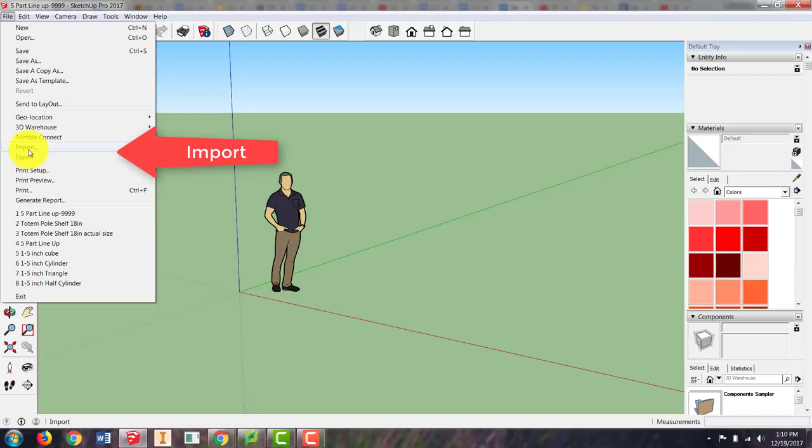It should default to your folder where you can see your 5 parts. The first one you made was the 1.5-inch cube. Select that and import. You will notice how small it is in comparison to the person there.

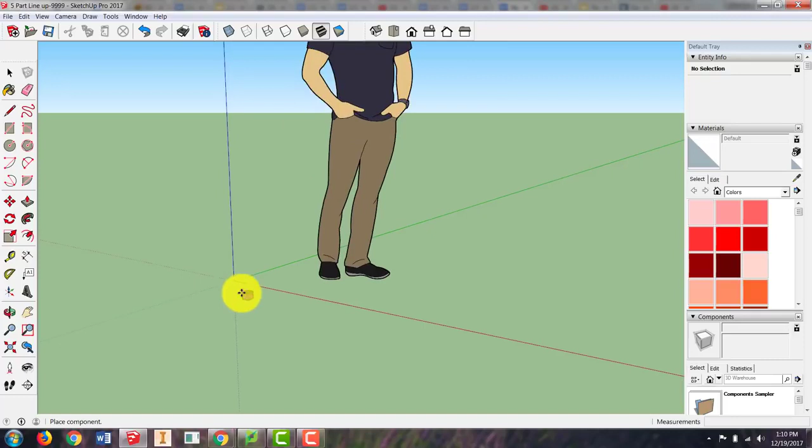So zoom in to the 3 axes. I always like to start on the intersection of those, the origin. It should snap to that center point. Click and release, and you have it in place there.

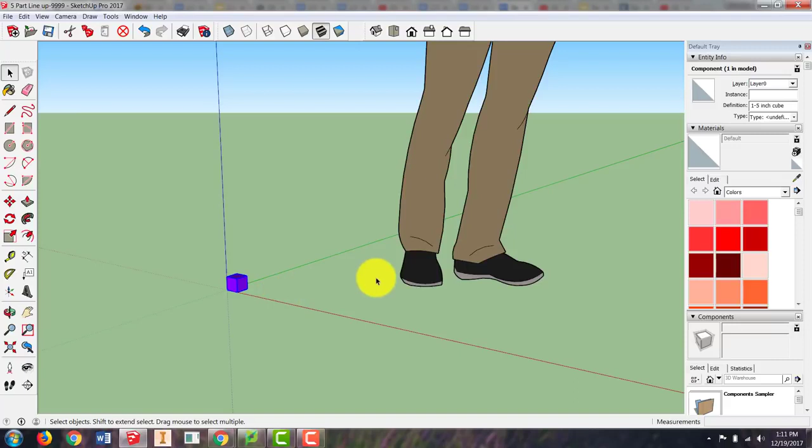Now, with the selection tool, now that I have my first object down, you can see in relation to the person if it's the right size. That is my 1.5 inch. I'm going to remove the person so we can import our next one.

Go up to File, Import, and select the next one, which I believe was the 1.5 inch cube with hole. Import. Now when it's pulling it in, I'm going to try and keep all 5 of my parts on this red axis line, so they're all in a row. It should be easy enough.

It should snap to the red line. Go ahead and put it close to the first one. Click once, and it releases and places that object. Now we can go get our third part.

Go up to File, Import, and the cylinder. Import. I'm going to bring that in. This one, notice it's snapping on the center line to the red line. That's okay, I'm going to place it there.

So far, so good. We're doing this so we can compare the different sizes to make sure we are on the right track with our sizes. It's difficult to see if we've made a mistake with our sizes when it's in its separate file, so it's a little easier with all 5 of them in one place.

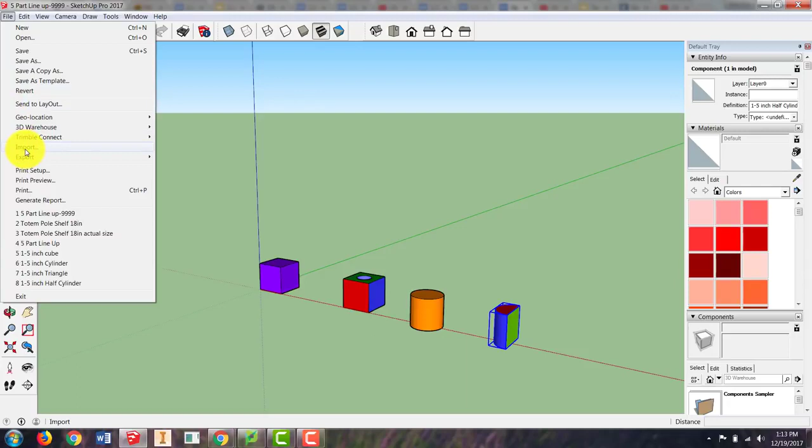I'm going to go up to Import again and choose my half cylinder, and I'm going to snap it to my red line. And the last one, I'm going to go up, File, Import, and choose my triangle, and place it on the red axis.

Now, at least I can see that they're all in line, they're all similar in size, but we're also going to practice moving these objects.

First, I'm going to use the selection tool, and I'm going to come down and select the cube with hole. I'm going to zoom in a little, and now, if you've used it before, the Move tool.

I'm going to select the Move tool, and the trick to using this Move tool is selecting a corner as a reference on where you want to place it. So I can move around the side of this box, and I can grab it from the center, the corner, or other sides.

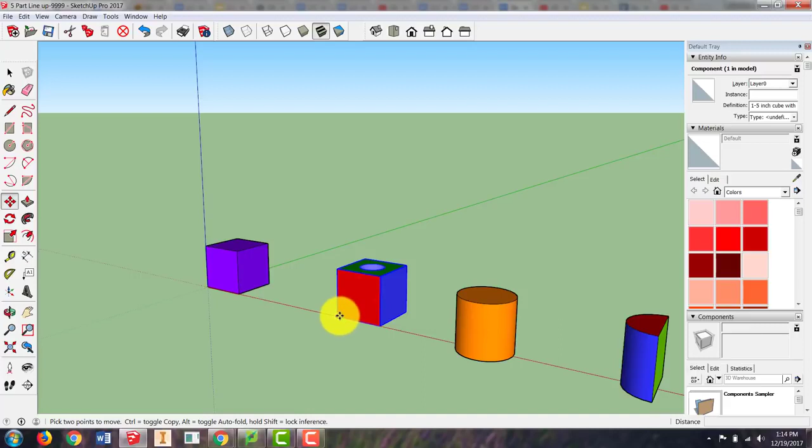Since I know I want to place this corner next to this corner of this object, I'm going to move this cube with the hole from this corner. I click on that, and it's going to slide, and I'll zoom in until it touches the neighboring object. I'm going to click and release, and you'll see that they are attached. You can rotate face to face.

Now, this is the tricky part with the Move tool. This is still selected. If I come over to my cylinder and click on it, it's just going to move the original box because I have not selected anything different. So I'm going to put that back in place, and I'm going to use the selection arrow and select my cylinder.

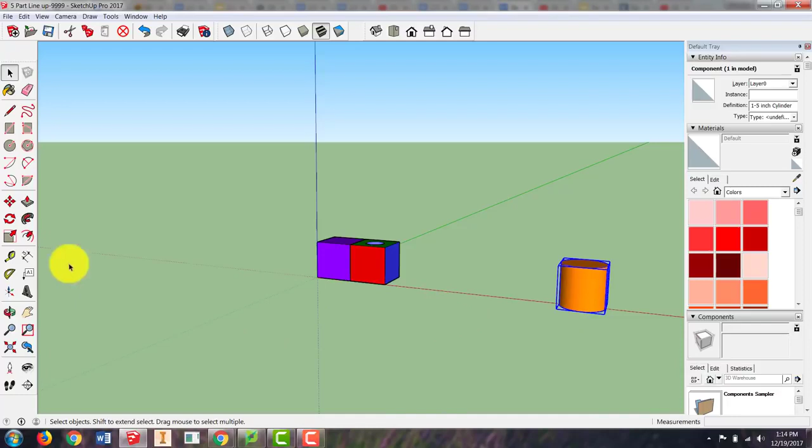Now I have that highlighted, and I can use the Move tool to move that object next to this one. Now, this gets tricky with circle objects. You'll notice if I zoom in, I can't grab this corner here. You can just grab part of the object on this rim.

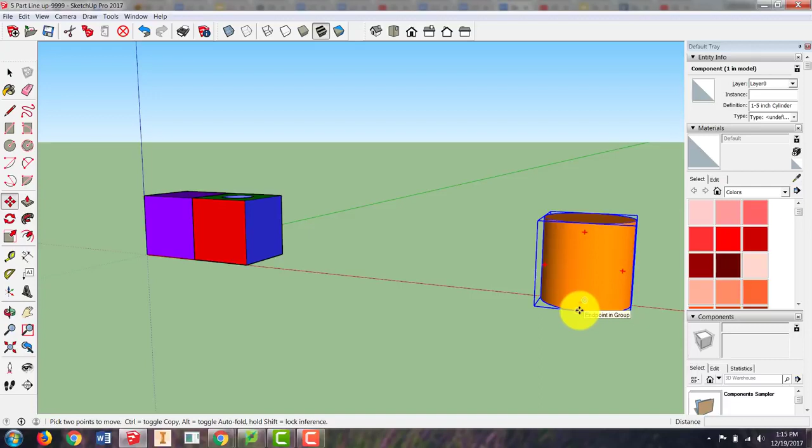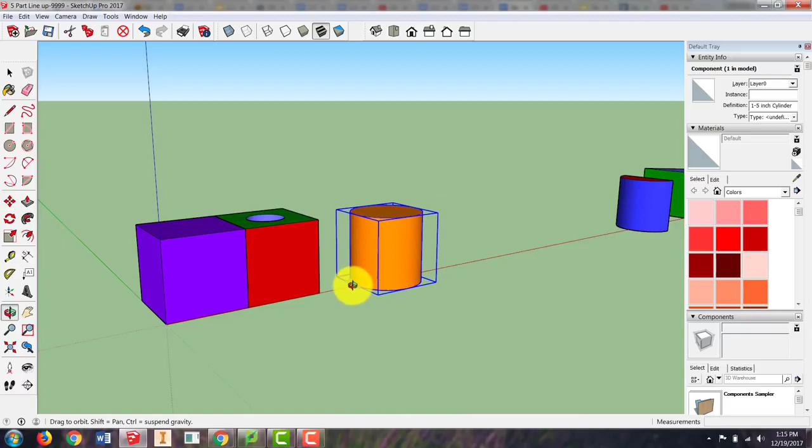So I can grab the end point here and move it over, yet that's not going to be the point touching the other object. So I'm going to get it close, and then I'm going to rotate it around. I'm going to place it there, and I'm going to try and grab it from the end point that will be meeting the neighboring object. So I click and select that part, and I'm going to rotate back a little so I can see it, and I'm going to try and place it right on the center of that other cube.

It's a little hard with circular objects. There we go, it's snapped in place. It's pretty close, and I'm going to place it there. If it overlaps a little, that's okay. I'm just putting them in line so I have a great comparison to sizes. I'm noticing that they're all the same height as well as the same width, so it looks like so far my sizes are right on and all the same.

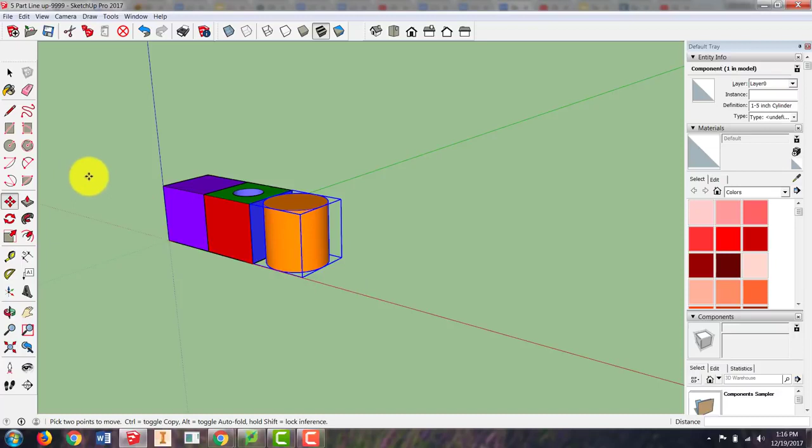I'm going to go up and grab my selection tool. I'm going to zoom out, and I'm going to select my half cylinder. Now I'm going to grab my Move tool, and I'm going to zoom in.

This part's hard again because I can't grab this corner, so I'm going to have to rotate around and grab the end point at the back of this cylinder, right in the center. I'm going to click and release it, and I'm going to start moving it until it touches my orange cylinder. And I'm going to click to place it, and it looks like it's centered. If it's not exact, that is okay.

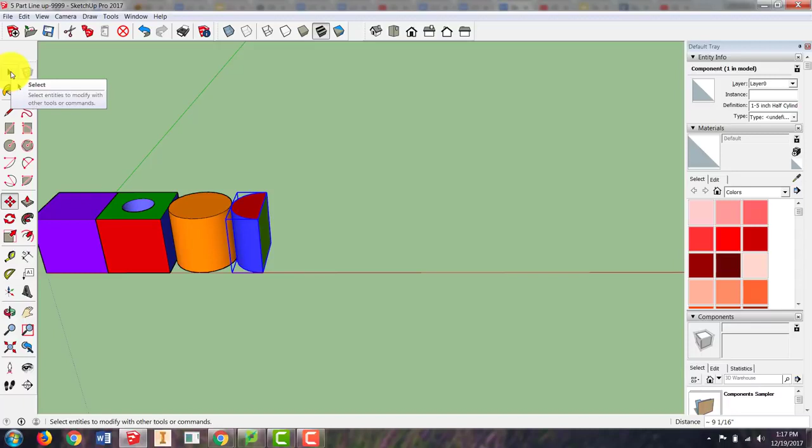One more remaining. I'm going to grab my selection tool. I'm going to zoom out, select my triangle, and then go back and grab my Move tool. This one should be a little easier because I have a corner to select, and it will be able to meet up with this other corner of the half cylinder.

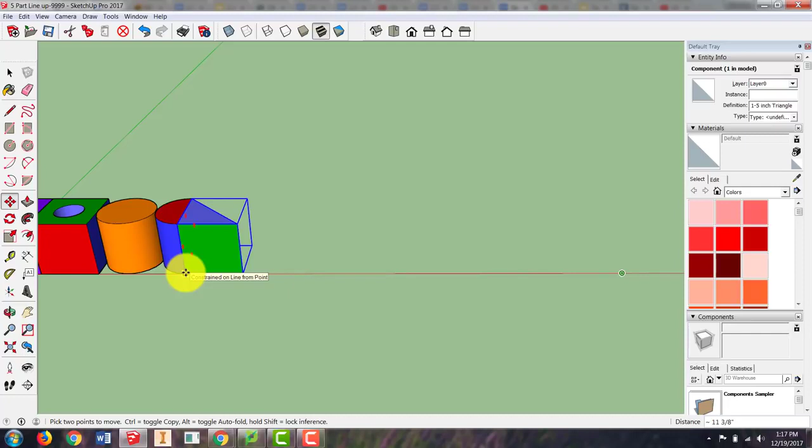I click to place it, and you'll see all 5 parts there. Now if I use my Zoom Extents tool, it should center all of our objects, and you'll see we have the 5 parts that we have made.

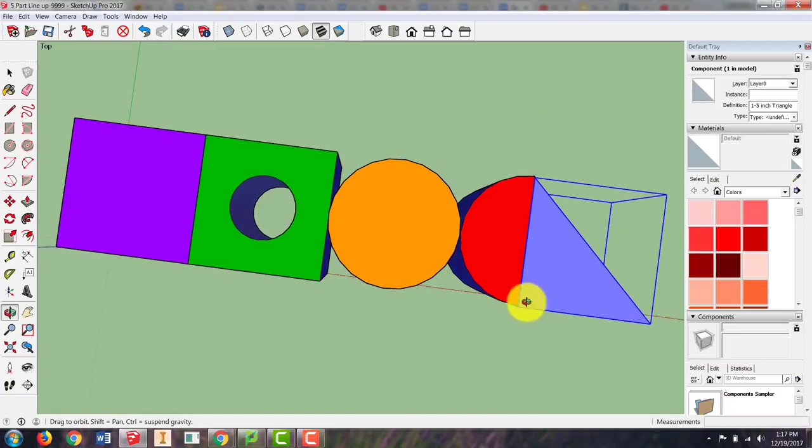So this is the screenshot we need. Make sure you click the Zoom Extents. All of your objects are in line. It looks like they are the same size. This is where you will know if you have an object the wrong size, that you will need to go back and remake it, or at least edit it in the original file, not in this file.

I'm going to go up and click File Save to make sure I have this object saved. I'm going to take my screenshot as is, where I have all my objects in row, and I'll place that screenshot into my engineering notebook.

You have just completed the 5-part lineup. Good luck.